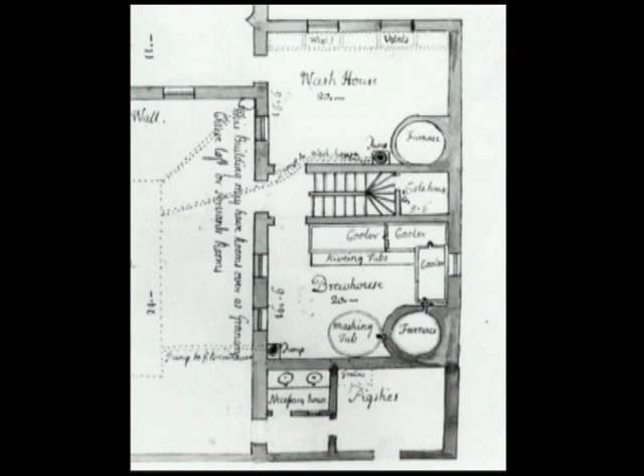The sanitary arrangements of an early Georgian house were basic. Bathrooms were unheard of. Instead, most houses had a small shed containing a fixed wooden seat with a round hole. This was the privy, although it went by other names such as the necessary or bog house.

The seats often contained 2 or more holes graded according to the size of the user. The waste accumulated in a heap under the seat. This was known as a midden and was periodically emptied by nightmen. Commodes, portable seats enclosing a chamber pot, were often used in closets adjacent to bedrooms.

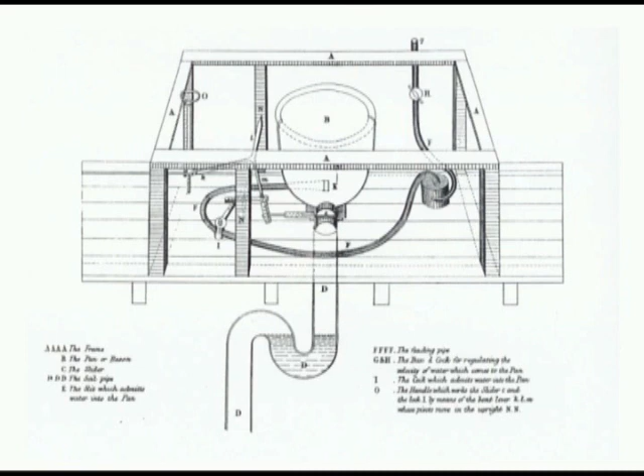By the 1750s, water closets were being introduced into the very best houses. They consisted of a basin or pan which held a reserve of water. They were called valve closets, and the earliest description of one appears in a patent taken out by Alexander Cummings, a London watchmaker, in 1775.

Cummings also provided a water-sealed trap to block the passage of sewer gas. To discharge the waste, a handle in the seat was pulled upwards. The valve slid to one side, while another valve simultaneously admitted clean flushing water.

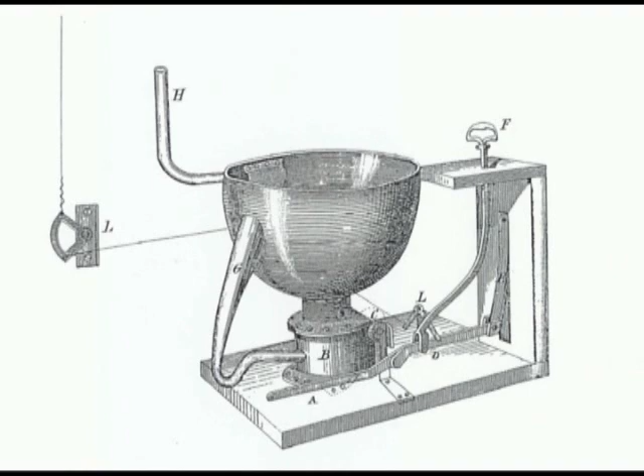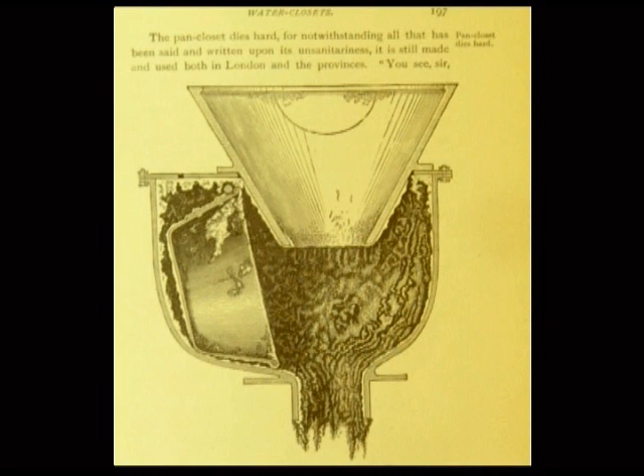Joseph Bramah patented an improved valve closet in 1778, and in 1780 the pan closet appeared. This relied on a tipping pan to discharge the waste. Enclosed in handsome mahogany cabinets, these mechanical closets were expensive and complicated, but by the 1820s were in widespread use in middle-class homes.

The increased use of water closets at this time was, however, something of a mixed blessing. The fundamental problem was that water closet technology, whatever its shortcomings, had outstripped that of sewage disposal. The waste from the average early 19th century WC didn't travel far. Many drained into cesspits in the backyards of houses. Some discharged into nearby rivers, and others directly onto the street.

At a time when the populations of towns were rapidly expanding, the result was a catastrophic deterioration in the quality of river and well water. A wave of fatal diseases such as cholera and typhoid finally brought the problem to the attention of the government. Surveys carried out in the 1840s under the guidance of the great public health reformer Edwin Chadwick revealed the true scale of the problem.

In 1848, the first Public Health Act was passed. Local authorities were empowered to create sanitary authorities. And by the late 1850s, some towns and cities had embarked on massive programmes of sewer construction. Where sewers were laid, homeowners were compelled to make connections to them.

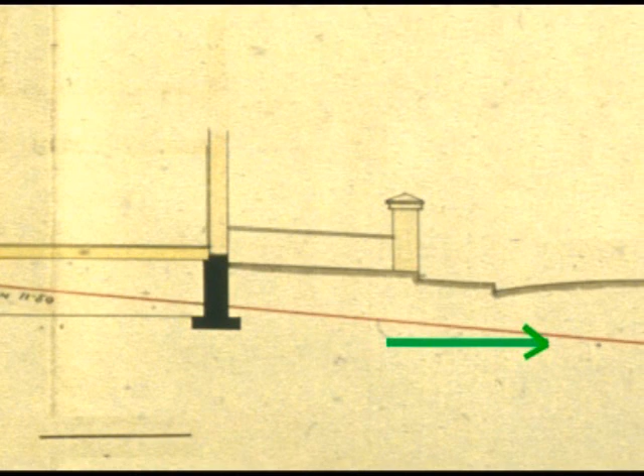As a consequence, water closets lost their exclusive middle-class image, and for the first time became a standard fitting in areas of working-class housing. However, many northern towns continued to use dry privies, where the waste was neutralised by earth or ash and collected in buckets.

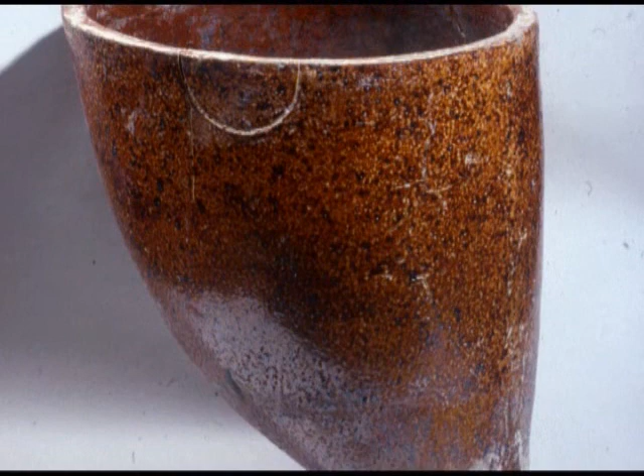The water closet of a working-class home was very different from the expensive mechanical closets used by the rich. They consisted of simple funnels or basins fitted to a water-sealed trap. They were called hopper or cottage closets, and some, like this closet of 1884, had no provision for admitting a flush. They were also usually placed in the backyard.

From the 1870s, improved supplies of mains water, better house drainage and improved standards of personal hygiene led to bathrooms being built in middle-class villas. Alongside fitted baths and wash basins with running hot and cold water, the water closet of the 1870s and 1880s rapidly evolved into an all-ceramic water closet without valves.

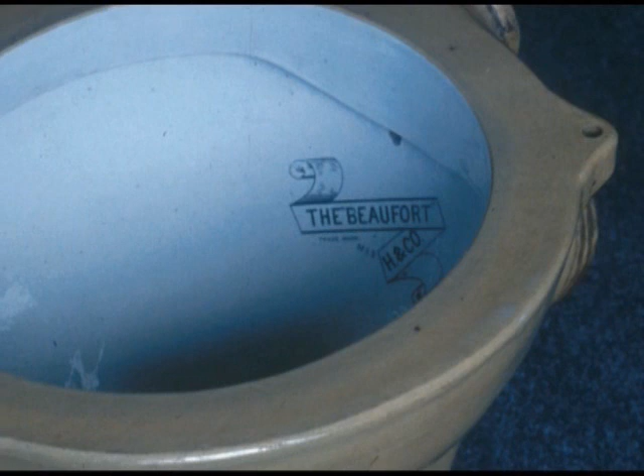The first pedestal washdown toilet, the Beaufort, was introduced by Frederick Humpherson, a London manufacturer, in 1885. The modern water closet had finally arrived.

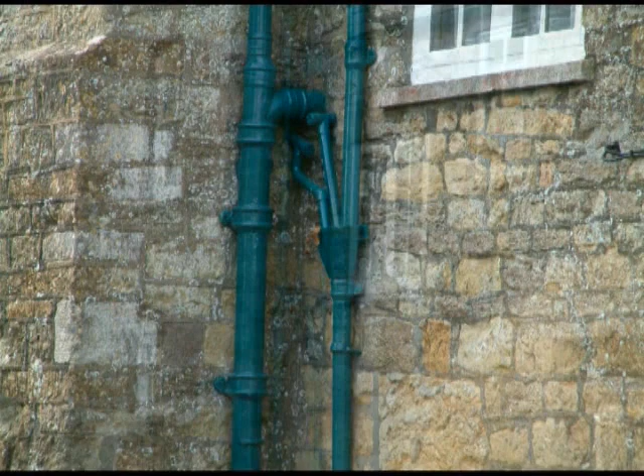A network of pipes above the ground is required to connect bathrooms and WCs to the underground drainage system. By the end of the Victorian period, the two-pipe system, usually made from cast iron, was the most common method. In a two-pipe system, one pipe collected foul matter from the water closet and another collected waste from the bath and basins in an open hopper head.

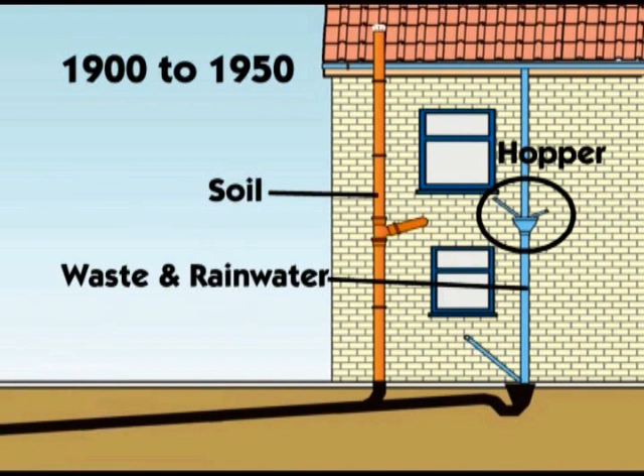This hopper also collected rainwater from the guttering. Although both pipes usually ended up in the same sewer, sanitary engineers of the time felt it was prudent to separate foul and waste matter above ground level.

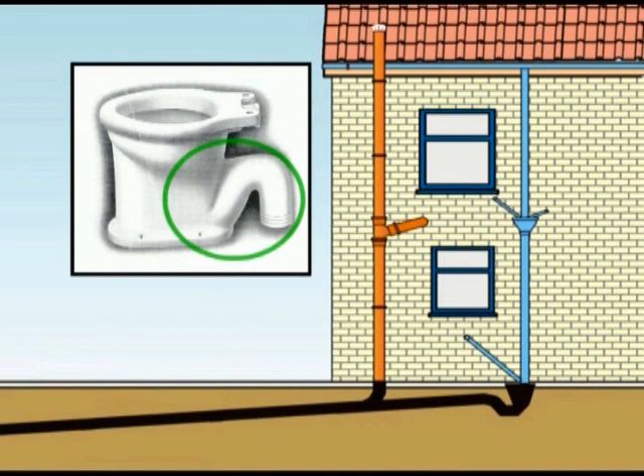Drain smells could not enter the house through the soil pipe because of the trap in the base of the WC. Smells couldn't rise through the waste pipe because it was usually trapped at its base. By 1900, most baths and basins were also trapped.

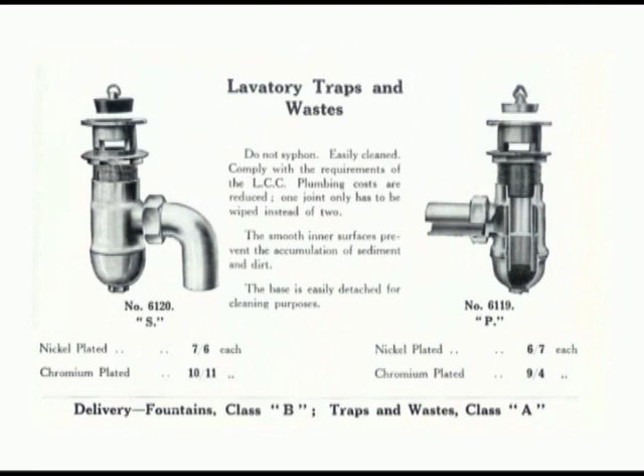The soil pipe continues up beyond the roof to provide ventilation for the drainage system and keep smells away from the occupants. The kitchen sink waste fed directly into the trapped gully at the foot of the waste pipe.

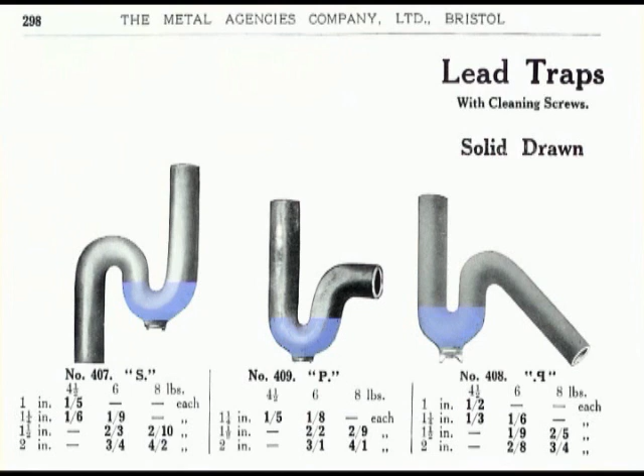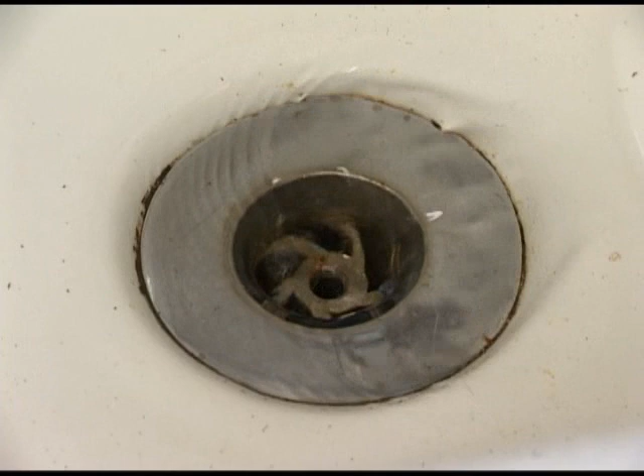For a trap to work, it has to be full of water. But there are situations where the traps below sanitary fittings can fail. These are caused by pressure variations, which can result in siphonage. Self-siphonage can occur where the waste, say from a basin full of water, runs fast and full bore along the branch pipe, taking the trap water with it.

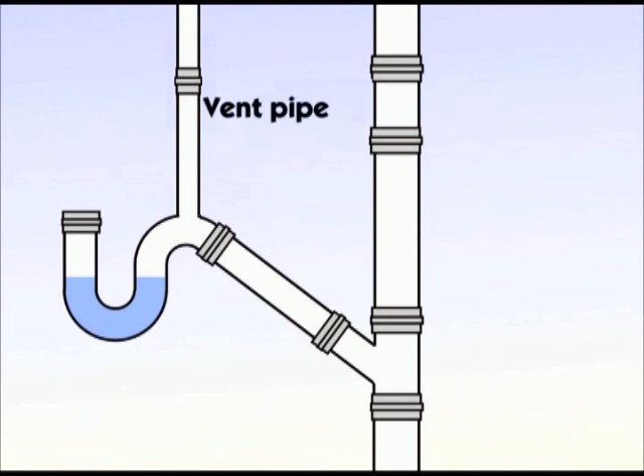Induced siphonage can occur where water from an upstairs fitting sucks water out of a lower branch pipe. In these early systems, siphonage was prevented by the addition of vent pipes. These extra pipes were expensive, complicated and untidy.

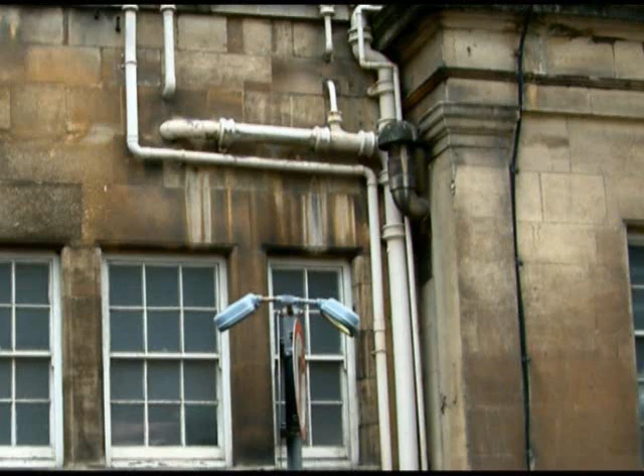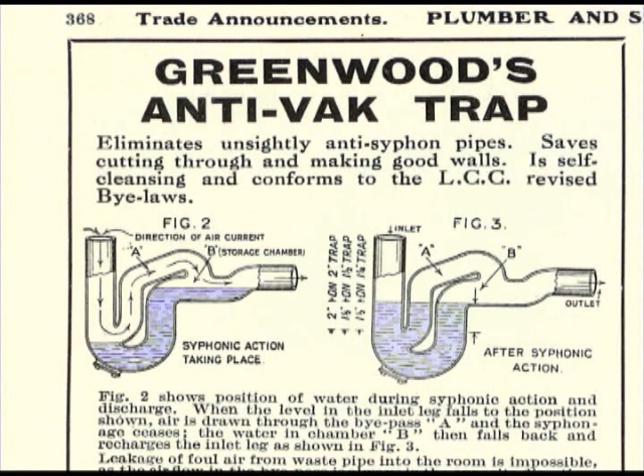Self-sealing traps, patented in the early 1920s, were an alternative solution. However, they were not cheap and could be quite noisy in operation. By the early 1900s, most underground drainage pipes were machine-made from extruded clay. During firing, salt was thrown into the hot kiln to provide a waterproof glaze.

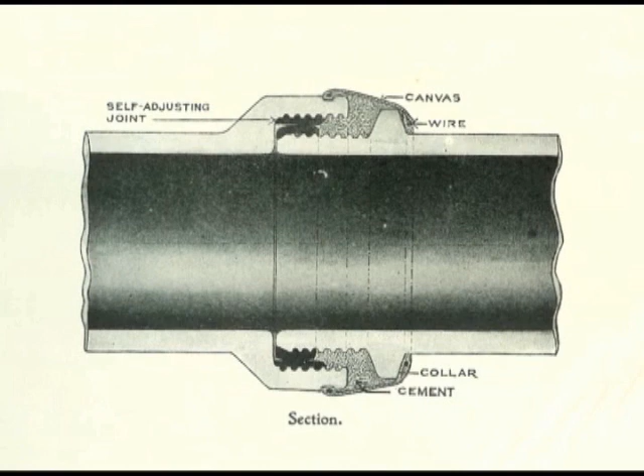Joints could be formed in a number of ways, and manufacturers were keen to promote their latest inventions. A typical joint would contain bitumen or tarred rope sealed with cement mortar. These rigid joints could not tolerate ground movement, so cracks and leaks were common. A variety of bends and fittings were made to suit any drainage layout, however complex.

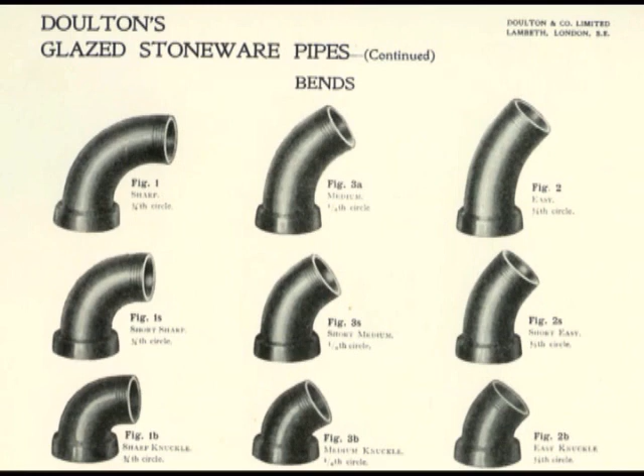During the 1920s and 30s, millions of private and local authority houses were built on large estates throughout the country. Most of these houses were built with cast-iron two-pipe systems which ran into a single combined sewer, usually located in the road.

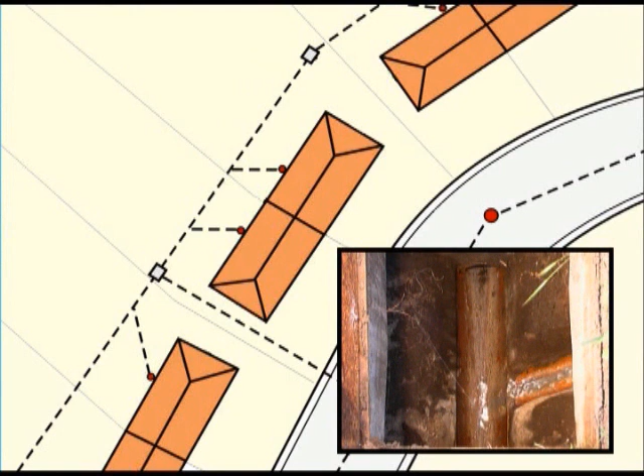In this 1920s estate, a shallow drain, approximately 500 millimetres deep, running along the back of the houses, picks up the foul water from the soil pipes. The branch pipes are swept in the same direction as the fall to help minimise blockage. In other examples, there might be inspection chambers to provide ready access. The rear drain also collects waste and rainwater from a shared waste pipe serving the bathrooms.

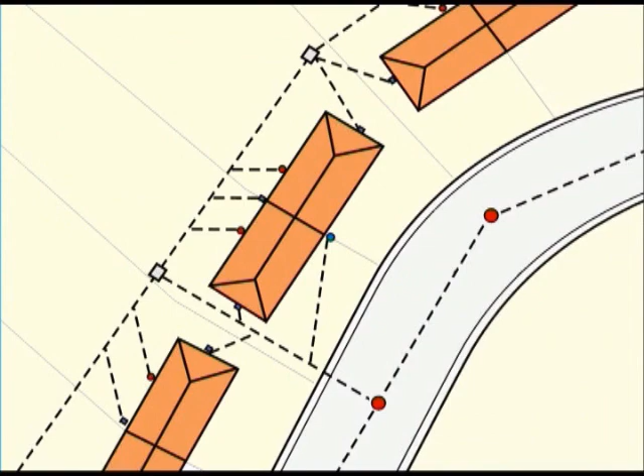To reach the sewer, the drain has to turn through 90 degrees and run between the houses. Blockages are always likely to occur at changes of direction, so an inspection chamber has been provided. As the drain runs towards the sewer, it picks up the kitchen waste and the side and front rainwater pipes. The sewer also collects stormwater from the road.

The effluent will eventually end up in the local sewage treatment works some 5 miles away. At regular intervals, changes of direction, and when there are branch connections, inspection chambers are provided for quick and easy access.

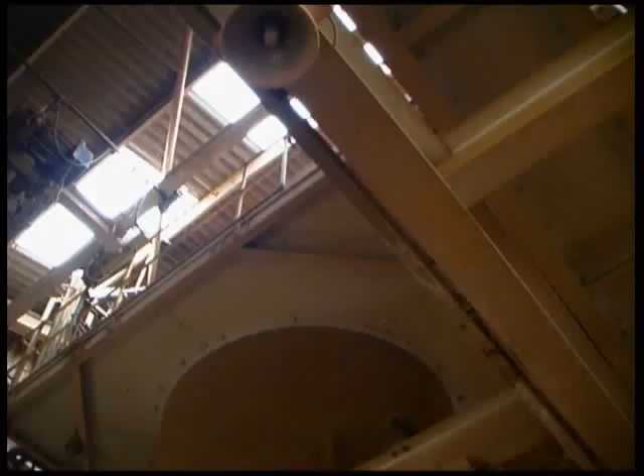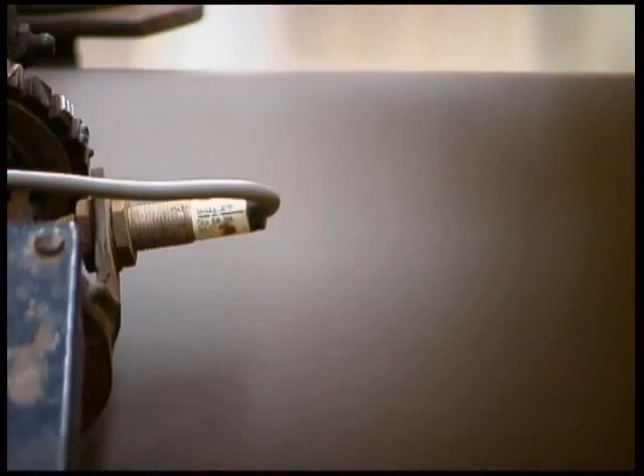For the last 30 years or so, plastic underground drain pipes have been available, but clay pipes and fittings are still very popular. In modern manufacture, blended clay is broken down by a crusher and is ground to a fine particle size. Water is added to make the mixture workable. The clay is extruded through a die to form a cylindrical pipe. Each batch of pipes is given a unique serial number to aid quality control.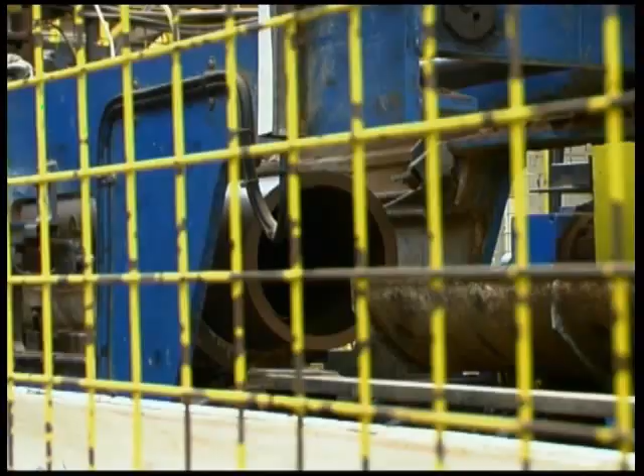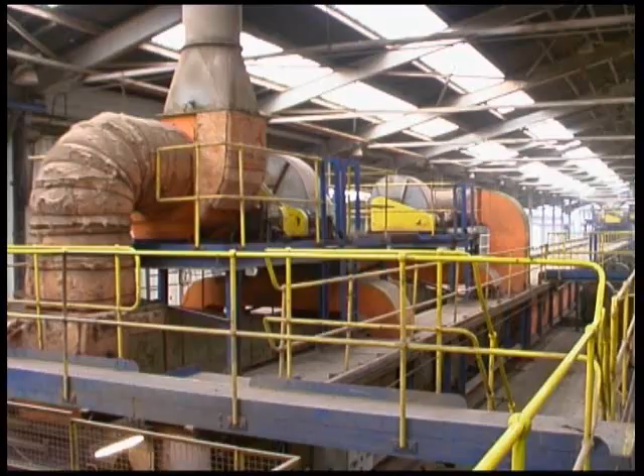Before the clay is fired, it's allowed to dry. During the drying process, the pipes are inspected for flaws. The pipes in this factory are fired in a tunnel kiln where the temperature is raised progressively to 1100 degrees. During firing, vitrification takes place. This is the process which gives the pipes their high density and impervious surface.

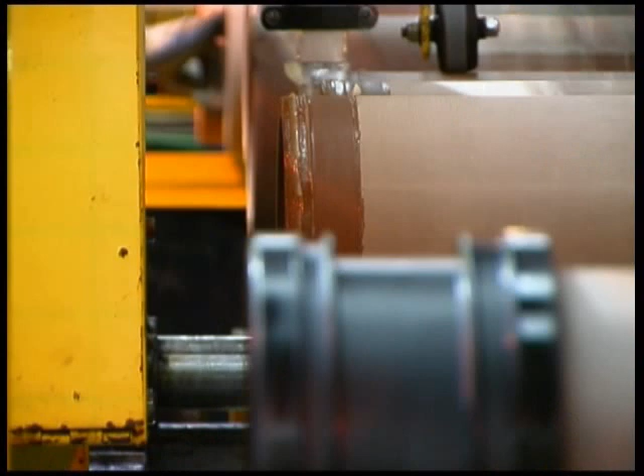These pipes, unlike their earlier counterparts, have flexible sleeve joints rather than spigots and sockets. This ensures that minor ground movement doesn't cause leaks.

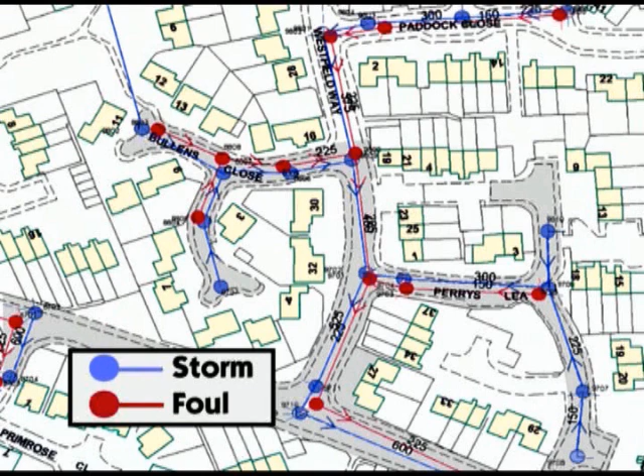In a modern underground drainage system, there are usually separate pipes for stormwater and foul water. The foul water from WCs, baths and sinks runs to the local sewage treatment works and will eventually be discharged into streams and rivers. Stormwater from roofs, paths and roads, by its very nature, is clean and can be directed straight into rivers without treatment.

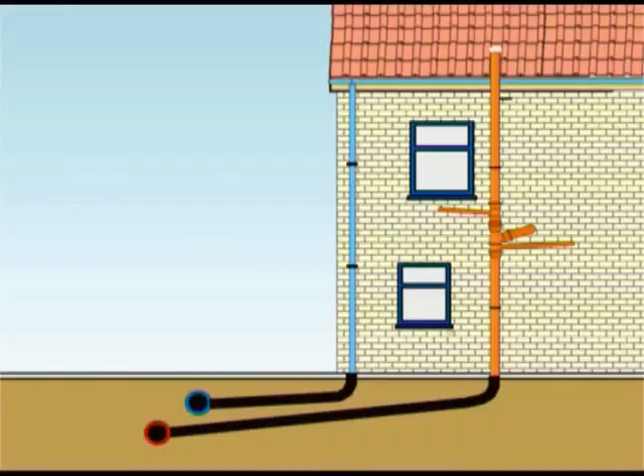This separate system of drainage, unlike the earlier combined system, reduces the load on the sewage works. In addition, there are no peak loads following high rainfall. Above the ground, the soil and waste water is now usually carried in one pipe, called a single stack.

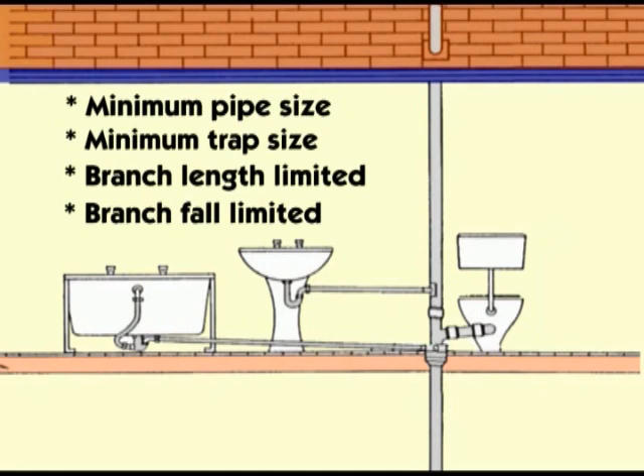Careful design can minimise the risk of siphonage. To this end, the building regulations require minimum trap and pipe sizes and limit the length and fall of branches to ensure that they do not run full bore. If the design parameters can't be met, ventilating pipes or self-sealing traps will have to be introduced.

On buildings up to 3 stories high, the stack can be fixed either inside or outside the house. Above this height, the stack must be fixed inside for reasons of frost protection and access. The single stack system can easily be adapted to suit blocks of flats. Here, there are 2 flats on each story.

In modern systems, rainwater is not carried in the single stack. Rainwater downpipes take water from the guttering into the stormwater drain and onto the stormwater sewer. The sewer will also collect water from roads and paths.

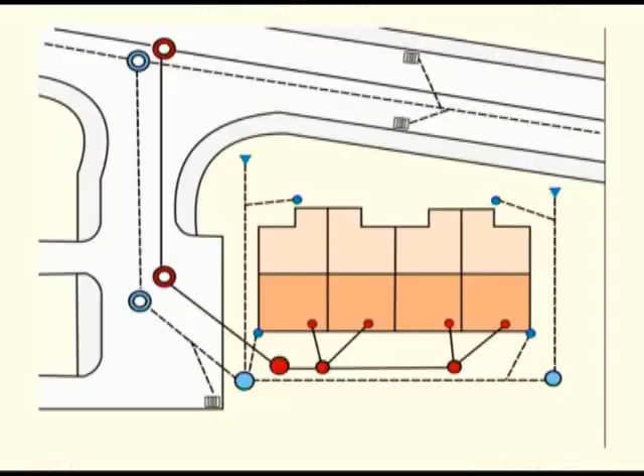On this housing estate, the underground drainage system is plastic, but whether plastic or clay, the connections to the above-ground drainage will be similar. Let's look at the foul connections first. The soil vent pipe runs into a rest bend. No trap is required because the WC has an integral trap.

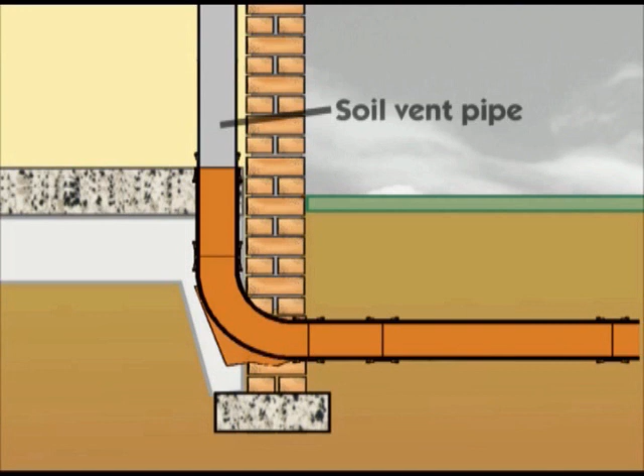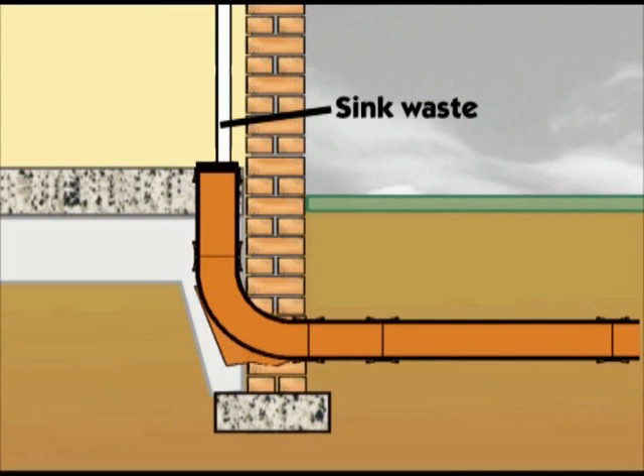A downstairs waste pipe, if not connected to the stack, can also run into a rest bend, but if quick access is required, it's better to use a trapped gully. The gully allows external access to clear blockages. The trap prevents smells escaping into the air.

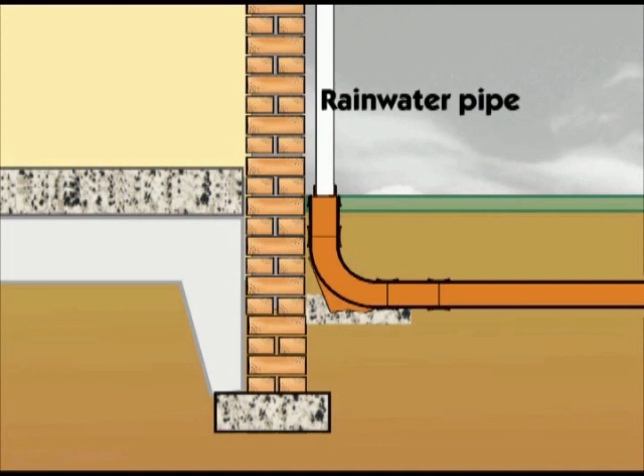The storm connections depend on whether the drainage system is combined or separate. In a separate drainage system, the rainwater pipes can join a drain with a simple rest bend. A rodding eye with a cover plate provides rodding access. A trapped gully is required if the system is combined. This can also collect surface water and provide access to clear blockages.

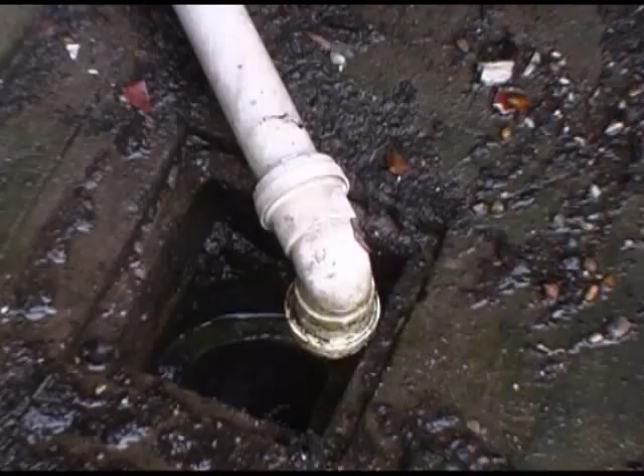A yard gully must be trapped if it joins a combined system. Even in a separate system, it's normally trapped in case of gases in the storm sewer.

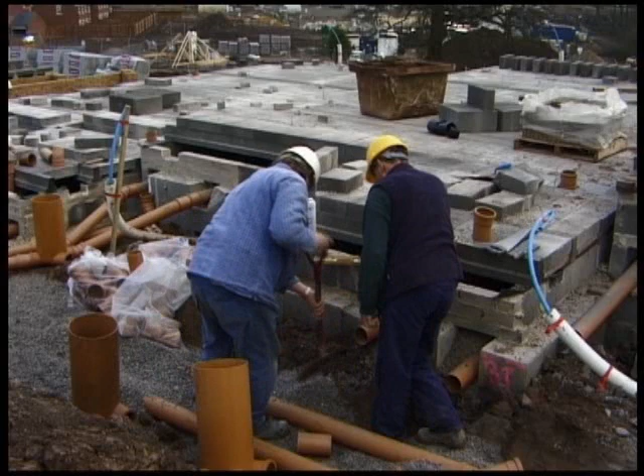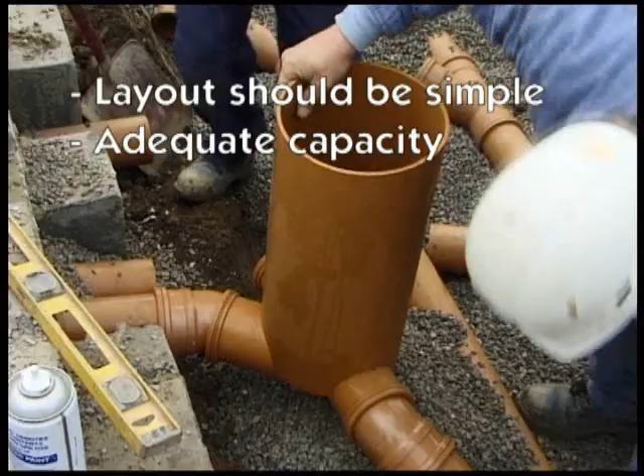The building regulations for drainage are in part quite complex. However, there are some basic principles. Layout should be simple, and pipes should have adequate capacity to carry the flow. Pipes should be laid to even gradients and in straight lines, at least straight enough for rodding.

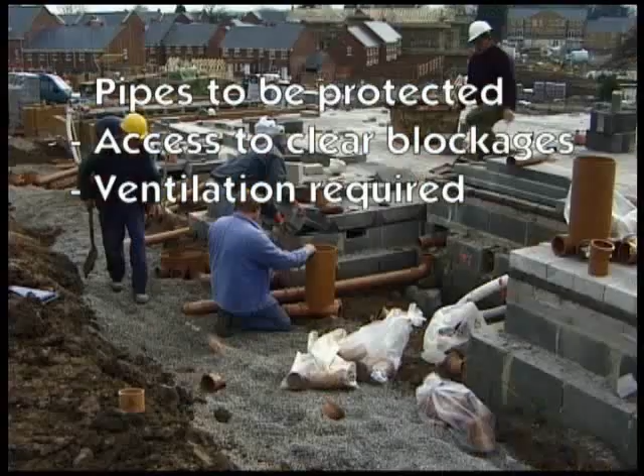The pipework should have adequate protection to minimise damage. Access must be provided at regular intervals to clear blockages, and the whole system must be adequately ventilated to prevent the build-up of harmful gases. And of course, the layout must be watertight.

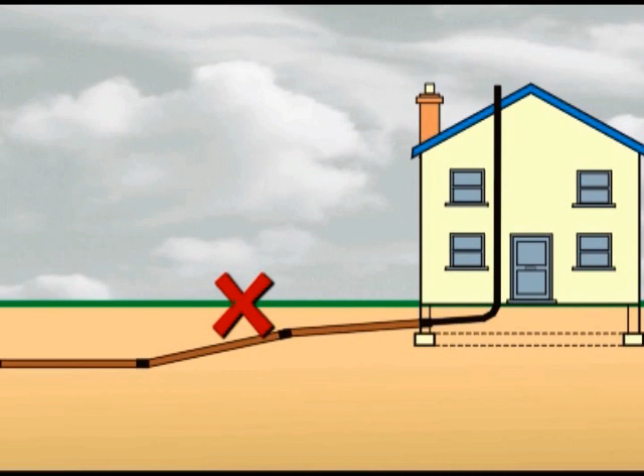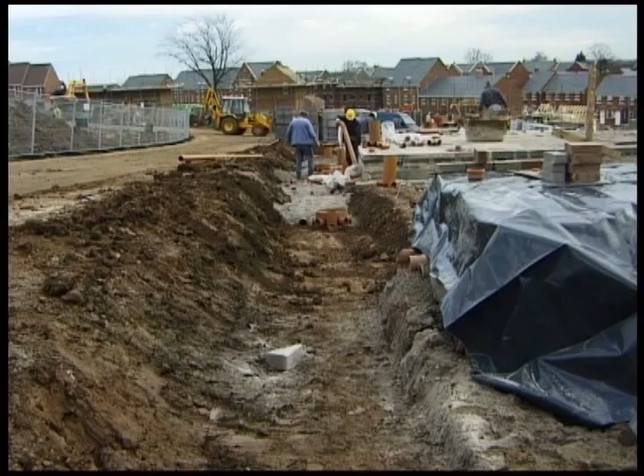Pipe trenches are nowadays nearly always excavated by machine, and ensuring the trenches are straight and dug to the right gradient is quite a skilled job. The choice of bedding and backfilling material depends on the depth of the pipes and their size and strength. If the ground is good enough quality, it's possible to trim the trench bottom and lay clay pipes directly onto the surface. The excavated material can be used as backfill.

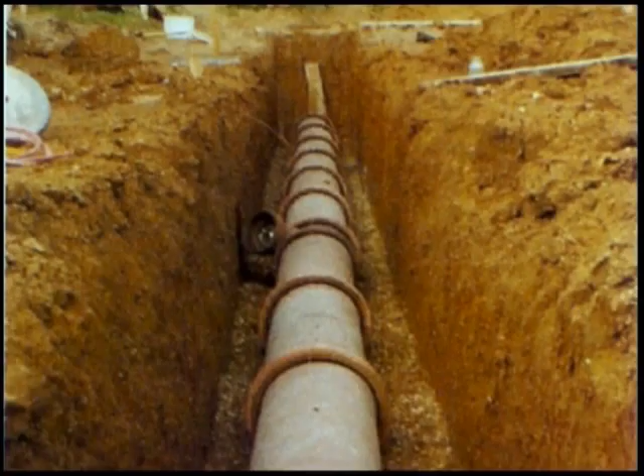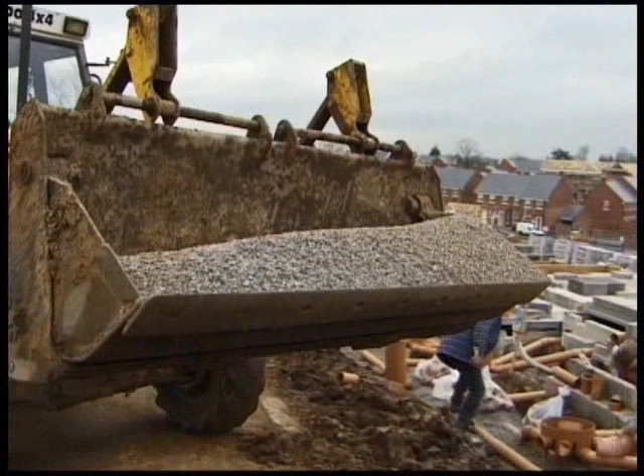In practice, it's usually cheaper and quicker to provide a gravel bed. The gravel must be free of fine material, or else it will compact and prevent the pipes from moving. Plastic pipes, because they're not as strong as clay ones, always require a gravel bed and surround.

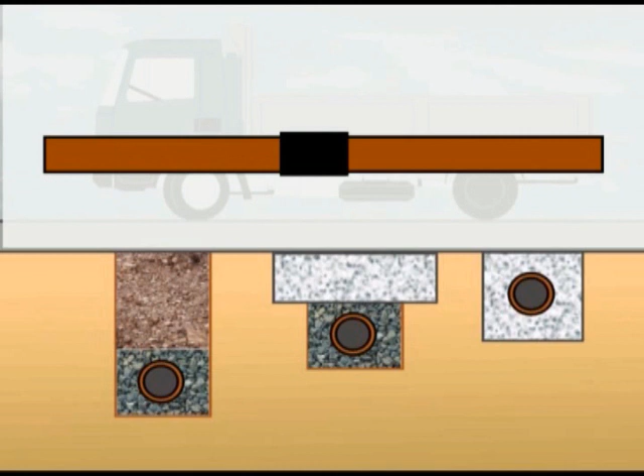Under drives and roads, trenches may have to be backfilled with hardcore. Where they're very shallow, protection can be provided by concrete slabs spanning the trench. Another option is to surround the pipes in concrete, although there must be gaps in the concrete at every pipe joint to allow for minor movement.

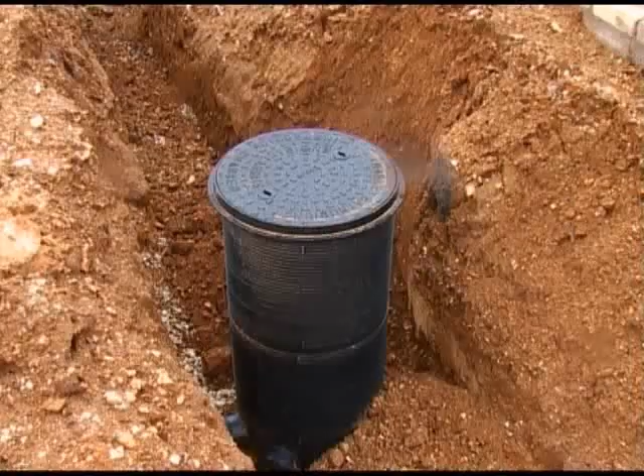Access points, usually in the form of inspection chambers, are required at regular intervals to clear blockages by hand or to allow rodding or jetting. They're required near the start of the drain run, at changes in direction or gradient, and where branches meet the main drain. They are also specified at maximum intervals on long runs.

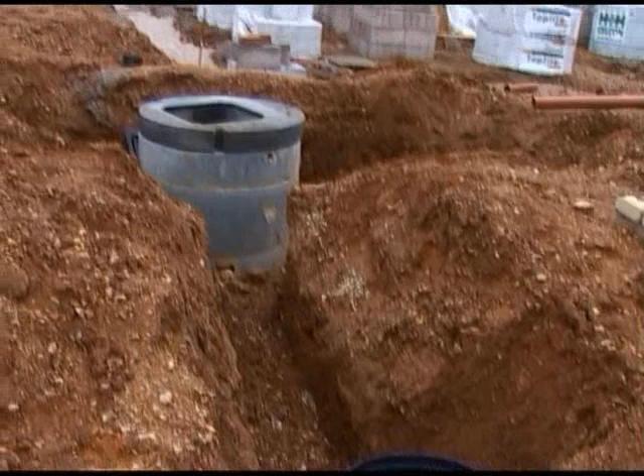Shallow inspection chambers can be made from clay or plastic, usually surrounded by concrete if they're on drives or footpaths. Deeper inspection chambers have to be large enough to climb into and strong enough to resist ground loading. They're usually made from pre-cast concrete rings of various diameters. Open channels at the bottom of the inspection chambers give access to the drain.

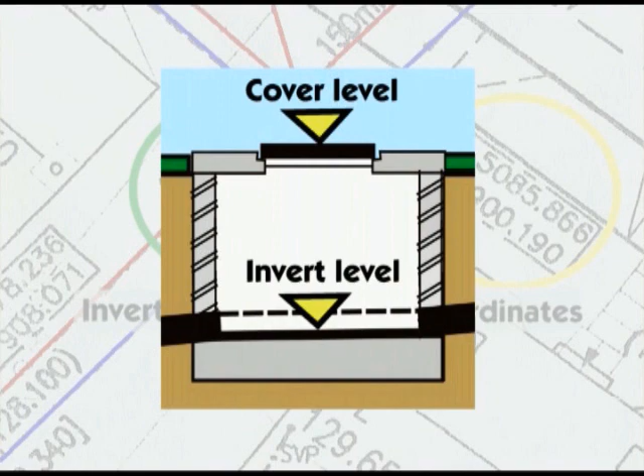At the design stage, the architect or engineer will plan the drainage layout, and this will determine the position of all the inspection chambers. A site plan, for example, might show their grid position and invert level. A schedule might specify their cover level, size and construction.

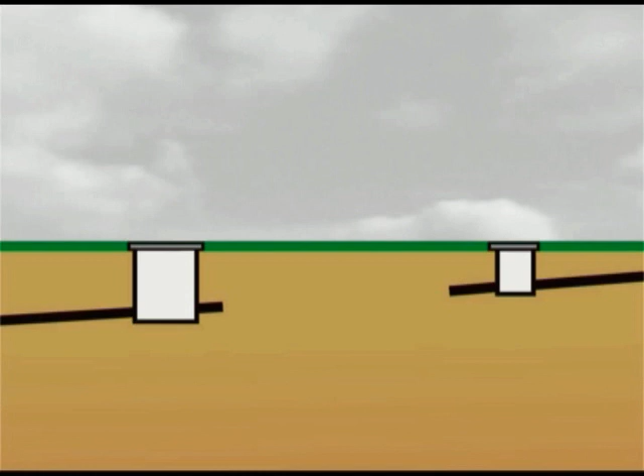The invert levels depend on the required falls. For example, if the invert level of 2 inspection chambers differs by 300 millimetres and they're 30 metres apart, the fall is 1 to 100.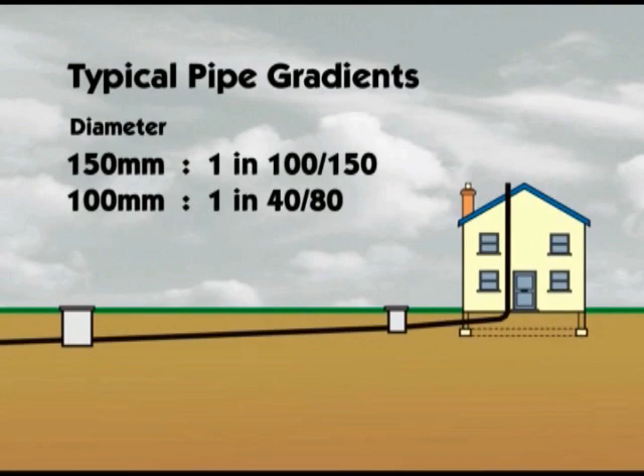Up until the end of the 19th century, raw sewage from the city of Bath was discharged straight into the River Avon. As the population grew, pollution levels in the river rose, until in 1910 work started on building a sewage treatment works at Saltford, a few miles from the city centre.

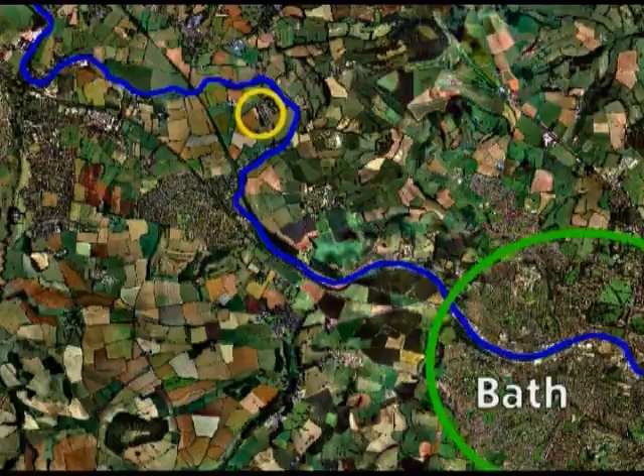Sewage from Bath flows under gravity to a pumping station on the outskirts of the city. From here, it's pumped through a 5-mile pipeline to the treatment works. The pipe can carry up to 25 million litres of sewage a day.

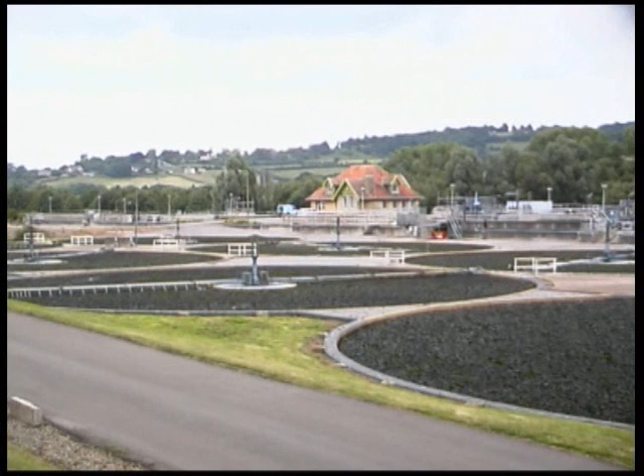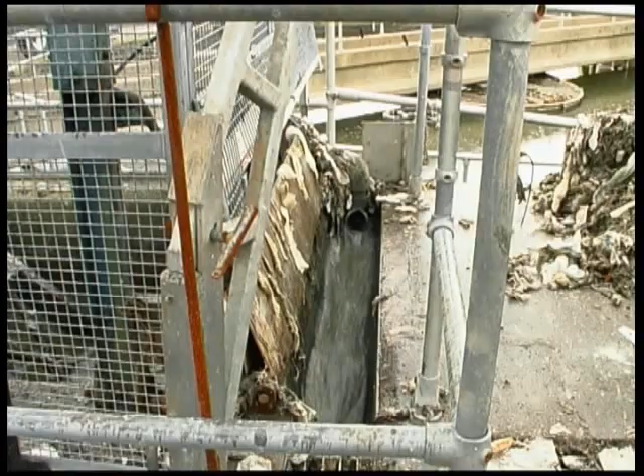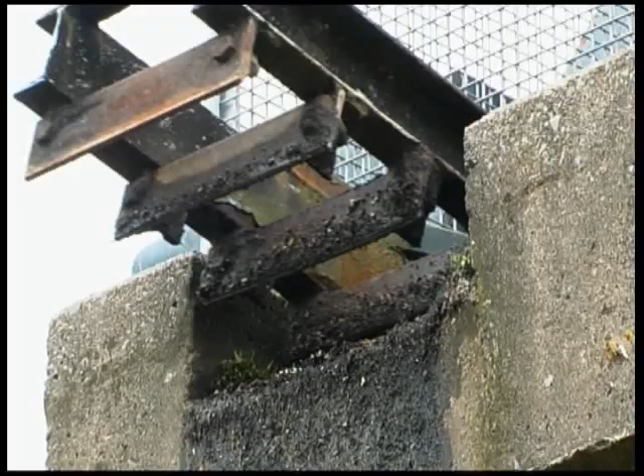As sewage enters the works, it passes through a screen which removes any debris such as rags, paper and plastic. This debris is washed, then shredded and put in a skip ready for licensed disposal. After screening, the sewage flows through a tank where any grit can settle to the bottom. Grit has to be removed at this stage to prevent it blocking later processes.

The sewage is then fed to primary settlement tanks, each of which is 14 metres deep with a steeply sloping floor. The sewage spends 2 to 6 hours in these tanks, during which time the suspended solids settle to the bottom, forming a sludge. A scum plate is fitted around the edge of each tank to hold back any fat or scum which collects on the surface.

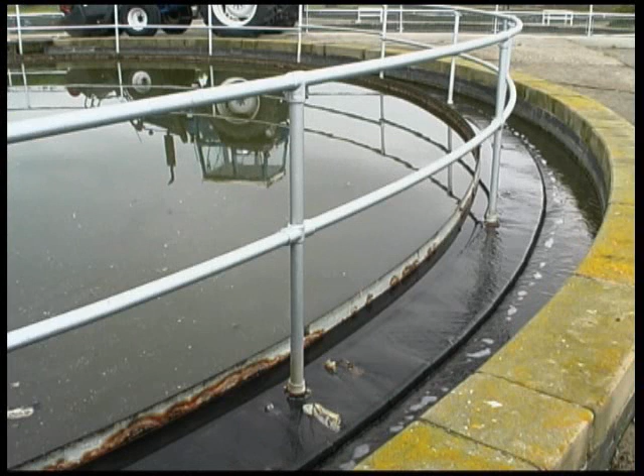Ferric sulfate is added to help settlement and to remove phosphates, which would otherwise encourage algae growth in the river. Phosphates are found in a variety of detergents and other cleaning products. The sludge is removed automatically and treated to turn it into dry, odourless granules, which can be used as a soil conditioner.

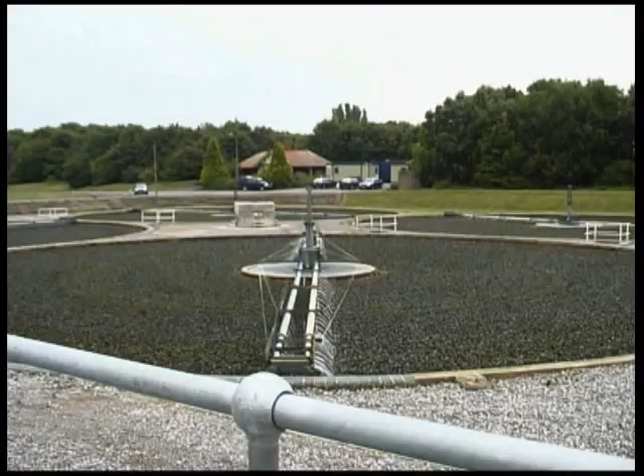At Saltford, there are 20 biological filter beds. Each one is 30 metres in diameter, 2 metres deep, and contains around 2,000 tonnes of blast furnace slag. This material, with all its pits and fissures, has a large surface area on which bacteria can grow. The bacteria feed on the sewage, helping to purify it.

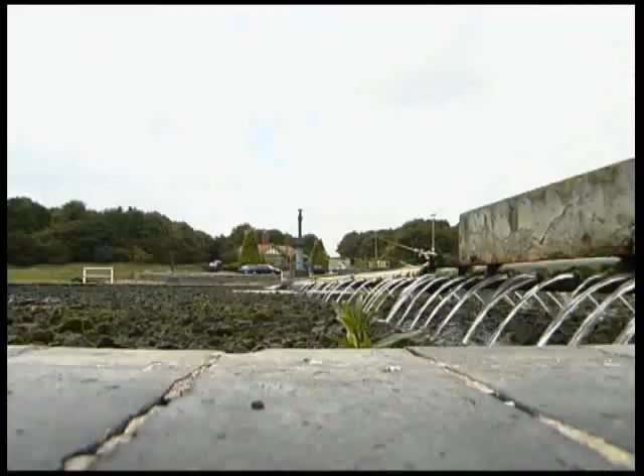The filter bed is also home to flies, worms and leeches, which eat up the bacterial slime, preventing the filters from clogging up. The sewage is distributed across the bed by a rotating arm driven by a water wheel which keeps the arm moving at a constant speed. Some rotate due to the jetting action of the water.

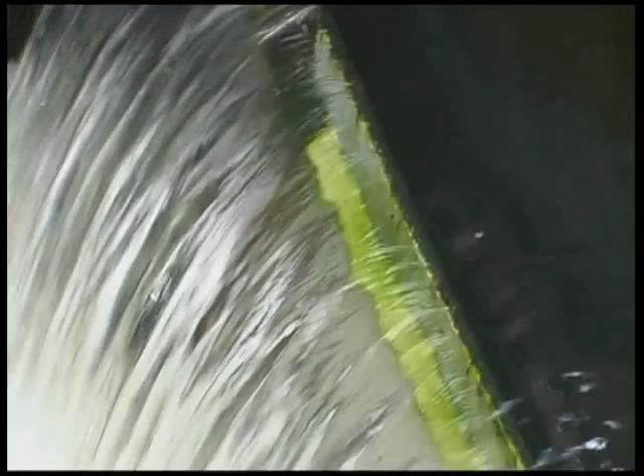The final settlement tanks allow any dead bacteria, called humus, in the water to settle, forming a layer of sludge which is removed and treated. The water is now clean and safe enough to be returned to the environment. It's discharged into the River Avon downstream of a weir, the turbulence aerating the water and keeping it fresh.